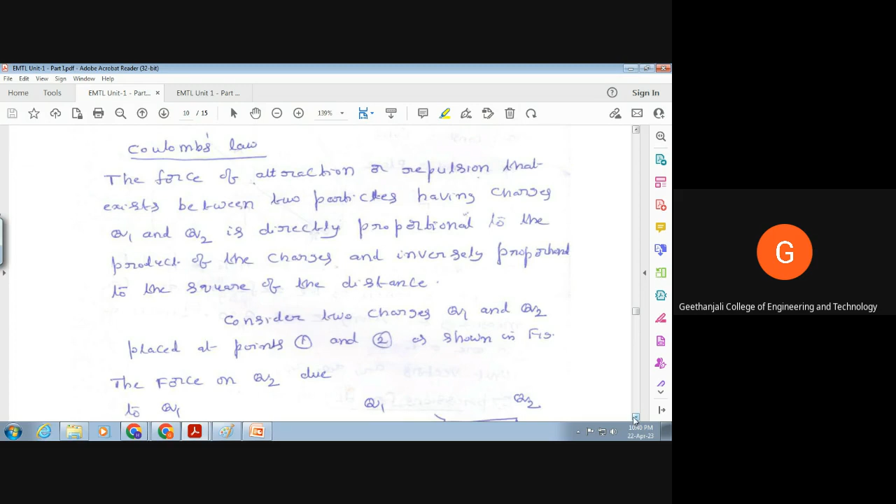For example, let us consider 2-point charges Q1 and Q2. Q1 is placed at point 1, Q2 is placed at point 2. The vectorial distance between 1 and 2 is R12.

Assume that Q1 and Q2 both are positive charges. Then Q1 will try to repel Q2 in its direction, and Q2 will try to repel Q1 in the opposite direction. Let F2 be the force on Q2 due to Q1.

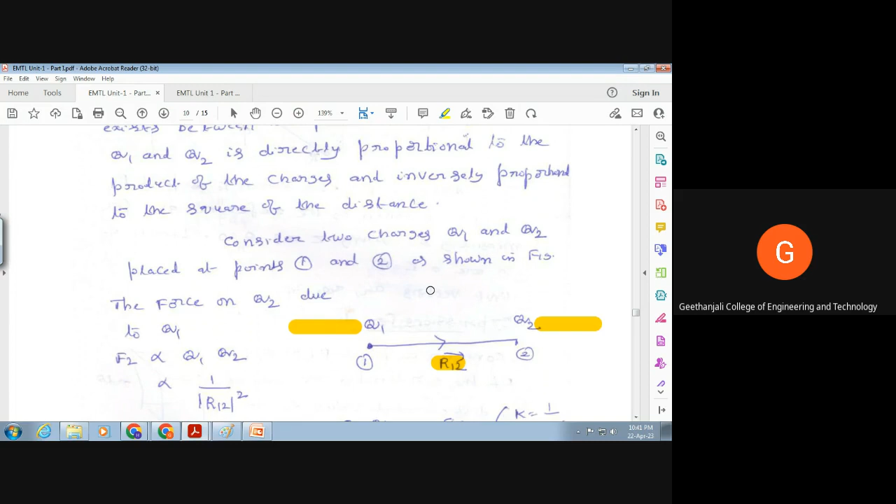Then F2 is proportional to the product of the charges Q1 into Q2, and inversely proportional to the square of the distance, that is, inversely proportional to R12 square. So if K is the constant of proportionality, F2 is equal to K into Q1 Q2 by R12 square.

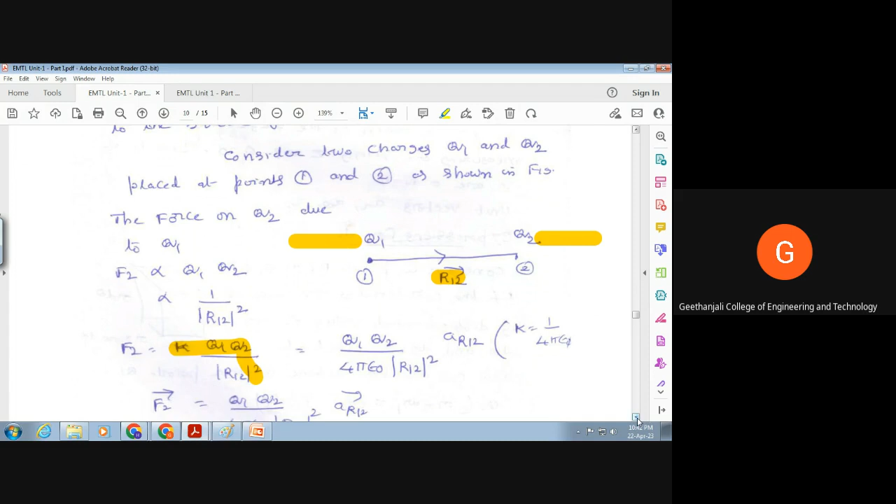The constant of proportionality is measured as 1 by 4 pi epsilon naught, where epsilon naught is the permittivity of free space. Its value is 8.854 into 10 to the power minus 12 farads per meter, which is also equal to 1 by 36 pi into 10 to the power minus 9.

The direction of F2 is along the line 1 to 2. That means if I can define a unit vector AR12, that is the direction of the force. So AR12 is equal to vector R12 divided by its magnitude. So the final expression is F2 is equal to Q1 Q2 by 4 pi epsilon naught R12 square. This is the magnitude of the force, and the direction is AR12, the unit vector along the line 1 to 2.

For example, let us consider this problem. 2 millicoulombs of positive charge is located at point 1, with coordinates 3, minus 2, minus 4, and 5 microcoulombs of negative charge is at P2, 1, minus 4, 2. Find the vector force on the negative charge.

So the vector force on Q2 is equal to Q1 Q2 by 4 pi epsilon naught R12 square AR12. This 2 millicoulomb point charge is at P1, minus 5 microcoulombs is at P2. The distance between P1 to P2 is represented by a vector R12.

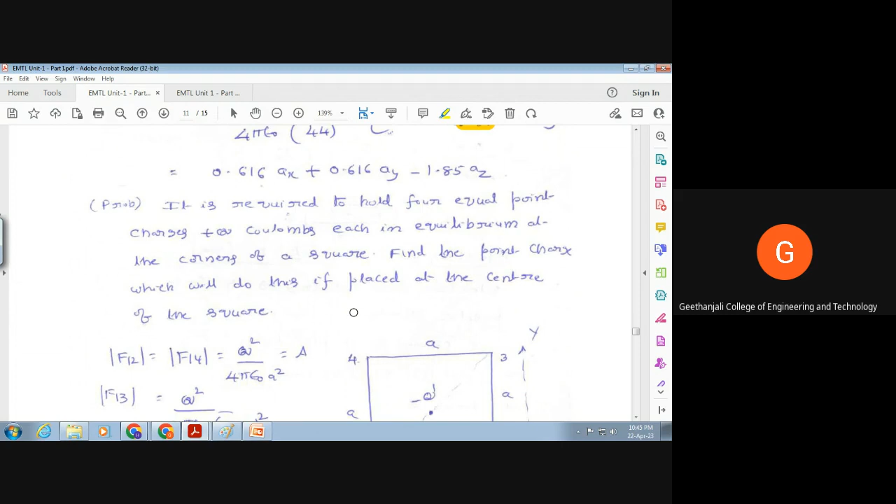Now let us consider this problem. It is required to hold four equal point charges, plus q coulombs each, in equilibrium condition at the corners of a square. Find the point charge which will do this if placed at the center of the square.

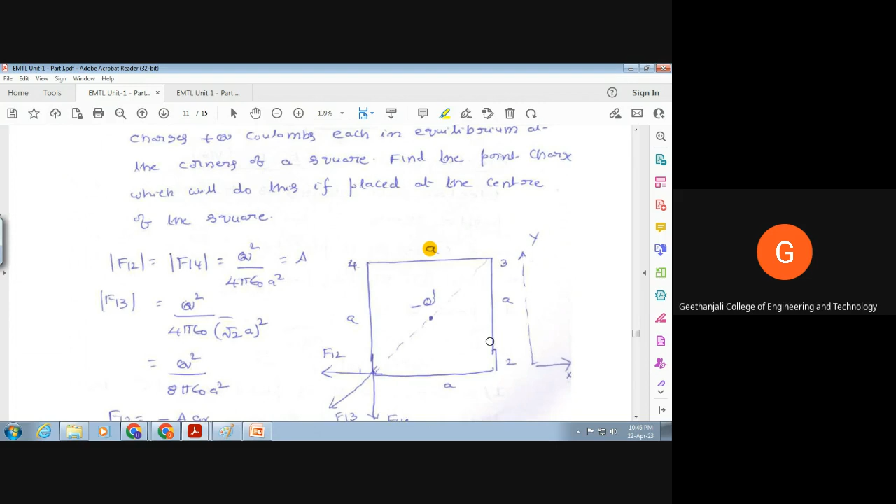So let us consider a square. Because the side is not given, assume that the side of the square is A units. So these are the four corners: 1, 2, 3 and 4. At each of these corners there is a point charge of q coulombs — at corner 1, corner 2, corner 3 and corner 4.

If we want these 4 point charges to be in equilibrium condition, that means in a state of rest, what is the point charge that I am supposed to place at the center? Let us see why we need an additional charge placed at the center for these 4 point charges to be in equilibrium.

So for that, let us find the force experienced by any charge, for example the point charge placed at corner 1. The charge at corner 2 will try to repel this with a force F12. F12 equals Q square by 4 pi epsilon naught A square, since the distance is A, and this is the direction of the force.

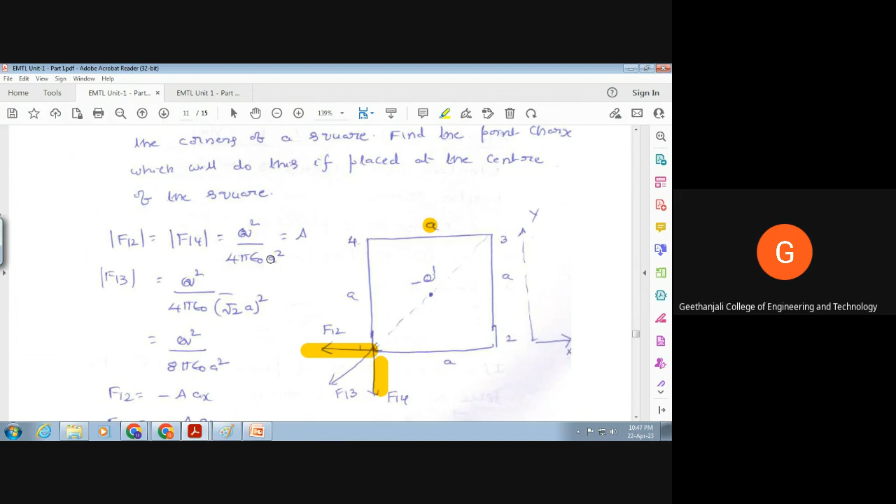Similarly for F14, the distance is the same, so the magnitude of F14 equals the magnitude of F12, which is Q square by 4 pi epsilon naught A square. But the directions are different. F12 acts to the left hand side, F14 acts in the downward direction.

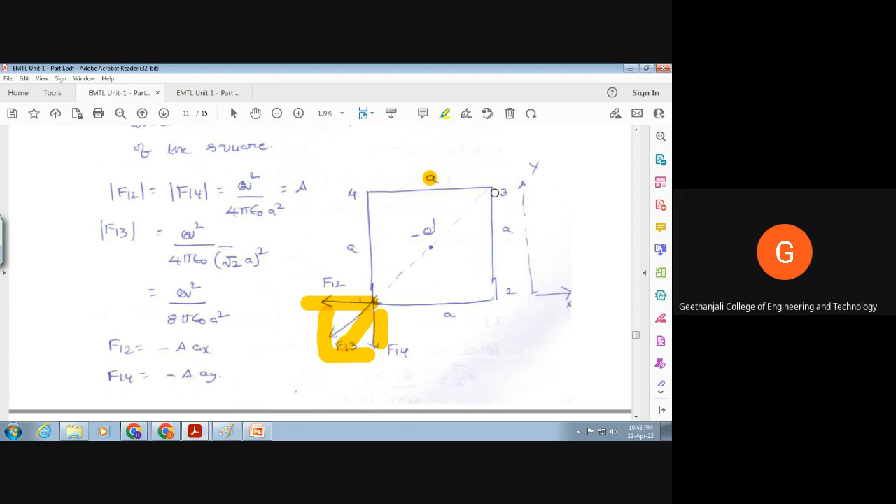Since the magnitudes are the same, the resultant of F12 and F14 will be in the diagonal direction. Now what about F13, the force on Q at corner 1 due to the charge at corner 3? This force also acts in the diagonal direction. So both the direction of F13 and the resultant of F12 and F14 are along the diagonal.

So ultimately the charge placed at corner 1 experiences a force in the diagonal direction. Because the situation is the same at the other corners, each of those charges also experiences a force in this diagonal direction.

So if I place 4 point charges at the four corners of a square and release my hold on them, what happens? Each point charge will try to run away from the rest because each experiences a force in the diagonal direction, until the force of attraction or repulsion becomes zero.

But here the problem is, I want these 4 point charges to be placed at the four corners in equilibrium condition. So for this, what is the point charge that I am supposed to place at the center?

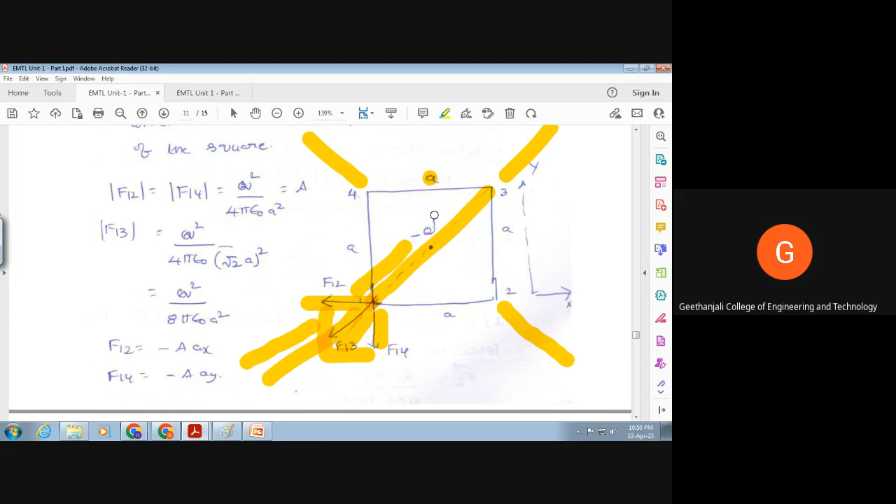So if this is the repulsive force and this is the attractive force, in order to create this attractive force, I have to keep a negative charge at the center of the square. The magnitude of the negative charge q dash has to be selected such that the attractive force equals the repulsive force.

Okay, now let us do this problem. F12 and F14 we've already discussed: Q square by 4 pi epsilon naught A square. F12 acts in this direction, and F14 acts along this direction.

Suppose I define this direction as the x-axis and this as the y-axis. What is the direction of F12? Minus A x. What is the direction of F14? Minus A y.

Next, what is the magnitude of F13? Q square by 4 pi epsilon naught, and the distance from here to here is root 2a, so root 2a whole square, giving Q square by 8 pi epsilon naught a square.

Now for the resultant of F12 and F14: F12 plus F14 equals minus A A x minus A A y. So the magnitude is A into root of 1 plus 1, which is root 2 A, and the direction is along the diagonal direction.

Total repulsive force is F12 plus F14 plus F13. Since F13 acts diagonally and the resultant of F14 and F12 also acts along the diagonal direction, I can add these two forces: root 2 times A, where A is Q square by 4 pi epsilon naught A square, plus F13 which is Q square by 8 pi epsilon naught A square. Taking Q square by 4 pi epsilon naught A square as a common factor, this becomes root 2 plus 1 by 2.

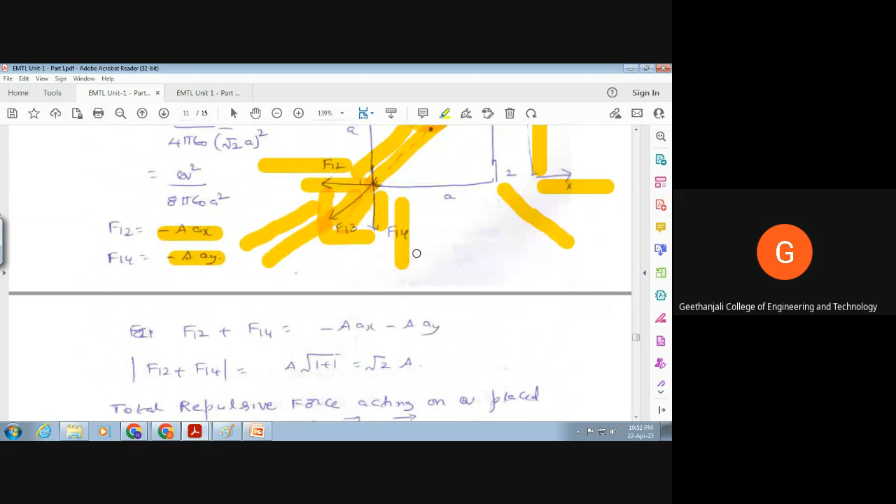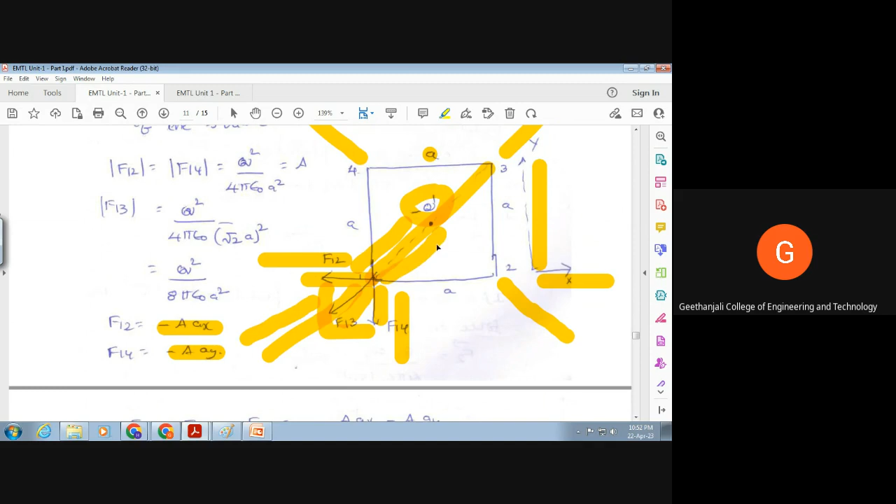Now, in order to counter this repulsive force, a negative charge has to be placed at the center. Let that negative charge be minus q dash. From that negative charge to corner 1, the distance is 1 by root 2 into a.

So the attractive force equals q into q dash by 4 pi epsilon naught, with distance 1 by root 2 a whole square. Equating these two forces, attractive force equals repulsive force, and ultimately you get q dash as 2 into root 2 plus 1 by 4 into q, which is 0.957 times q.

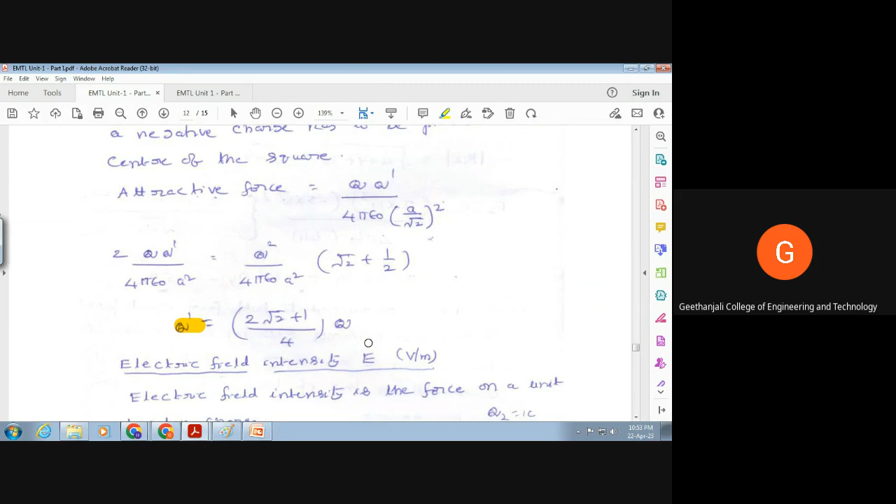Now, let us define electric field intensity. It is normally represented with the letter E and the unit is volts per meter. Electric field intensity is the force on a unit positive charge. So wherever you want to find the electric field intensity, you place 1 coulomb of positive charge and find out how much force it experiences.

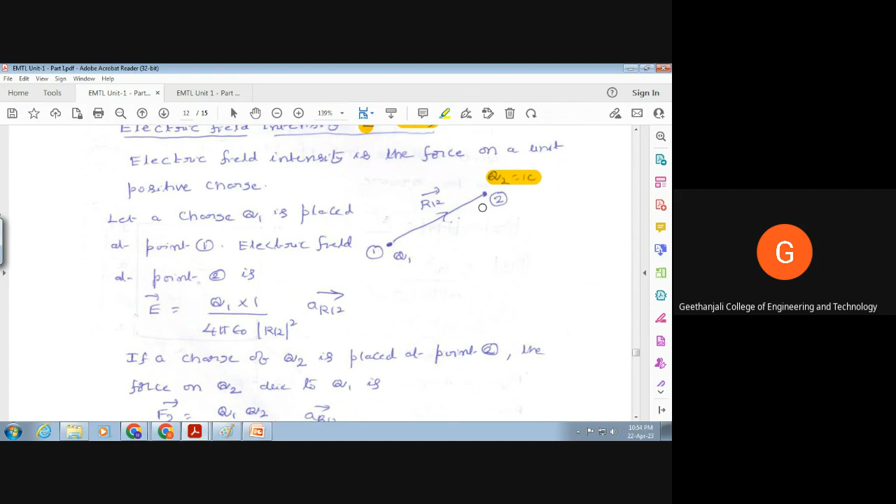Now, we have seen that suppose there are 2 point charges Q1 and Q2. What is the vector force on Q2? Q1 into Q2 by 4 pi epsilon naught R12 square AR12. So if I want to find the electric field intensity at point 2 because of charge Q1, I have to make Q2 equal to 1 coulomb, because electric field intensity is the force on a unit positive charge. Electric field intensity created by Q1 at point 2 is the force experienced by 1 coulomb of positive charge if placed at point 2. So that is Q1 into 1 by 4 pi epsilon naught R12 square AR12.

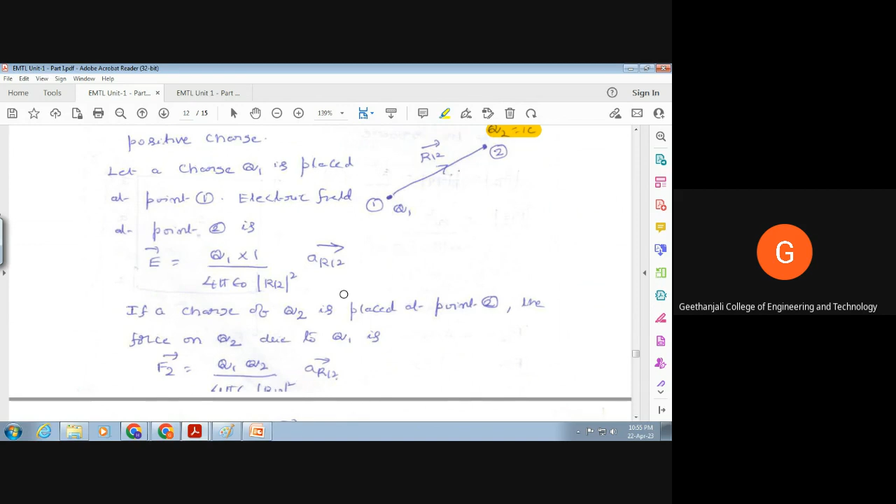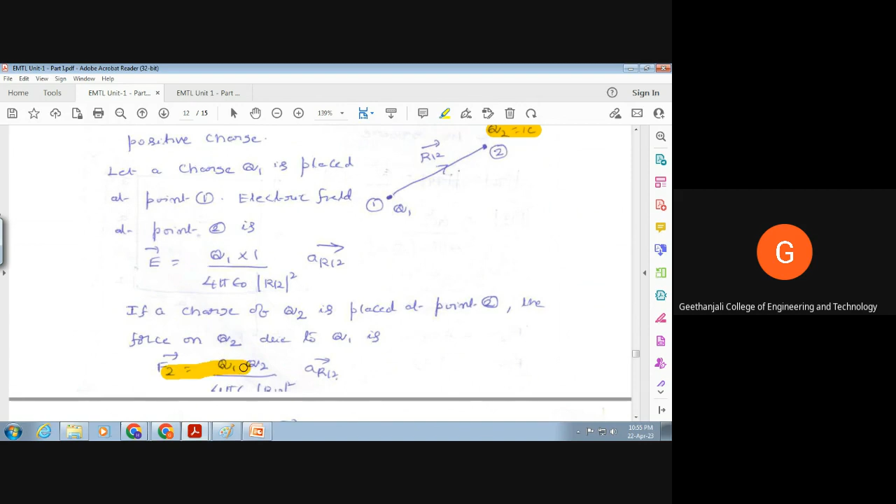Instead of 1 coulomb of positive charge, if there is a charge of Q2, how much force does it experience? Already we have this expression: Q1 into Q2 by 4 pi epsilon naught R12 square AR12. So when I compare these two, we can write F2 is equal to Q2 times E. In general, F is equal to Q times E, because electric field intensity is the force on a unit positive charge. Instead of 1 coulomb, if there is a charge of Q coulombs, how much force does it experience? Q times E.

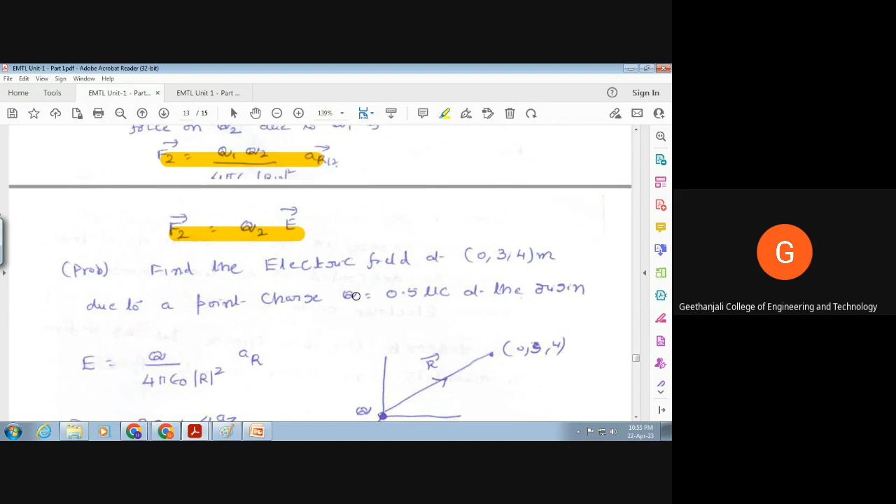For example, determine the electric field intensity at (0, 3, 4) due to a point charge of 0.5 microcoulombs placed at the origin. So at the origin there is a charge of Q coulombs, and at point P (0, 3, 4), what is the electric field intensity? What is the expression for the electric field intensity? Q by 4 pi epsilon naught R square AR. What is R? The distance from the point charge to point P, where we are defining the electric field intensity.

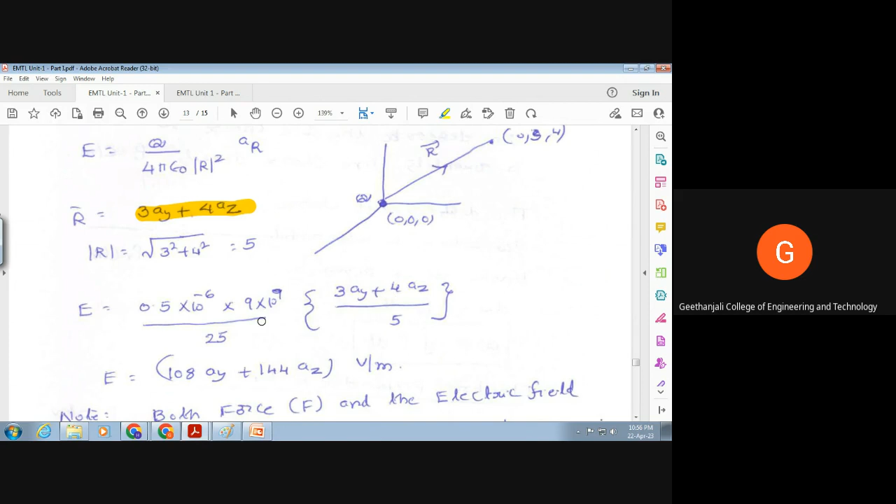Now, if you write an expression for R: 3 minus 0 AY, because x coordinate is anyway 0, so 0 minus 0 AX, 3 minus 0 AY, and 4 minus 0 AZ. So that's 3 AY plus 4 AZ. What is its magnitude? Root of 3 square plus 4 square is 5. So electric field intensity is Q, that is 0.5 into 10 to the power minus 6, times 1 by 4 pi epsilon naught which is 9 into 10 power 9, by R square so 5 square. AR is equal to vector R divided by its magnitude. So its value is 108 AY plus 144 AZ, in volts per meter.

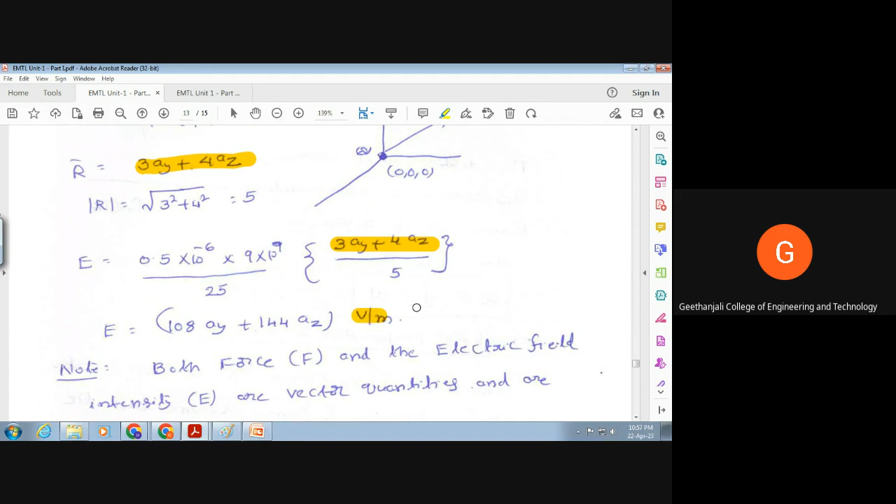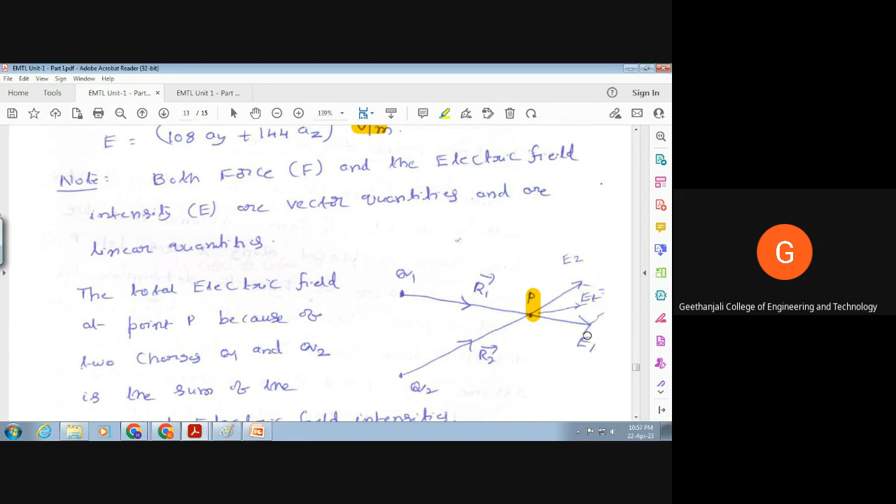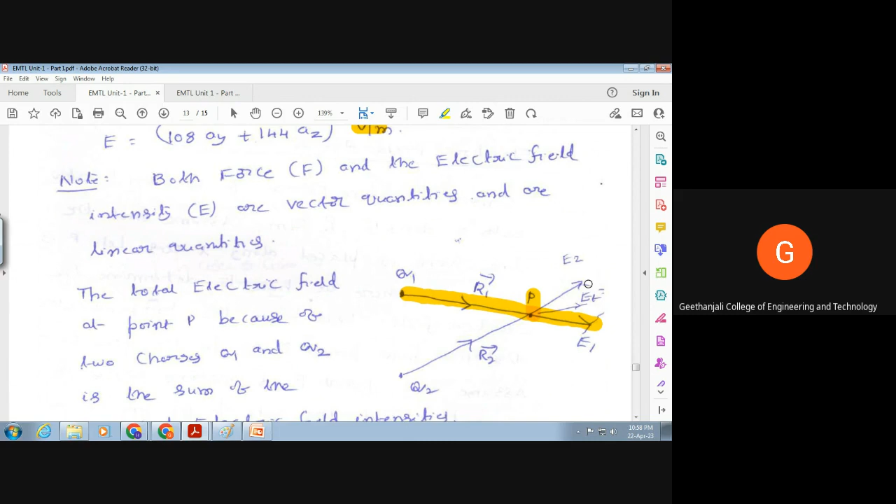One of the important things is both force and electric field intensity are vector quantities and are linear quantities. Linear quantity means, for example, you have a charge Q1 placed at point 1 and a charge Q2 placed at point 2, and you are required to find the total electric field intensity at point P. What you have to do is consider these 2 point charges independently. Find the electric field intensity at point P due to Q1, call this E1. What is E1? Q1 by 4 pi epsilon naught R1 square AR1. Similarly, find the electric field intensity at point P because of charge Q2, call that E2. And what is the total electric field intensity? E1 plus E2 gives you the total electric field intensity.

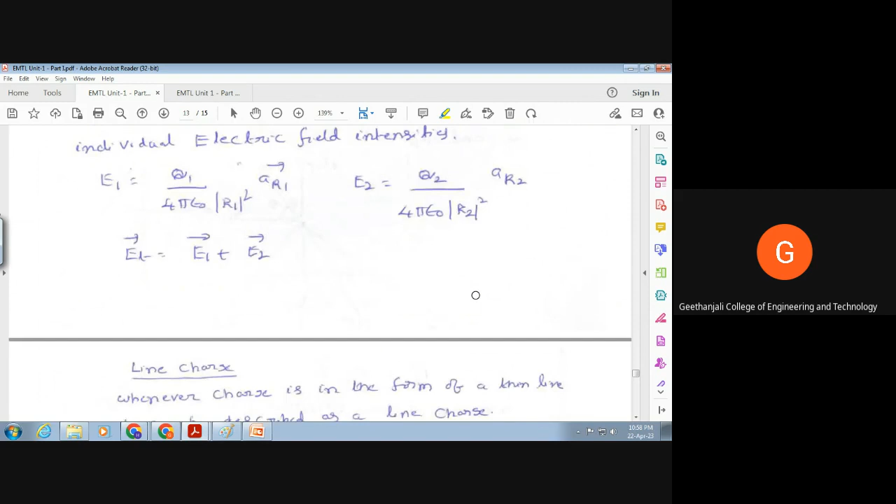Throughout the static electric field, our intention is to determine the electric field intensity at a given point for a given charge distribution. Charge appears in 4 different forms: point charge, line charge, surface charge, and volume charge. Ultimately, at a given point P, we need to find the expression for the electric field intensity due to these charges, whether it is a point charge, line charge, surface charge, or volume charge. Our intention is to determine the electric field intensity at a given point. So in the next class, we are going to discuss the line charge, and how the electric field intensity can be obtained due to a line charge.